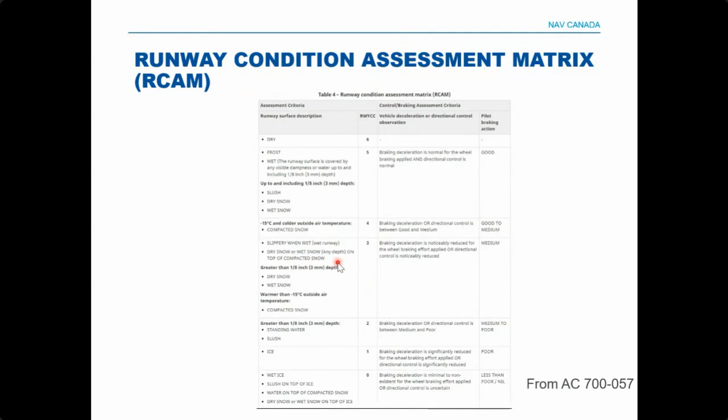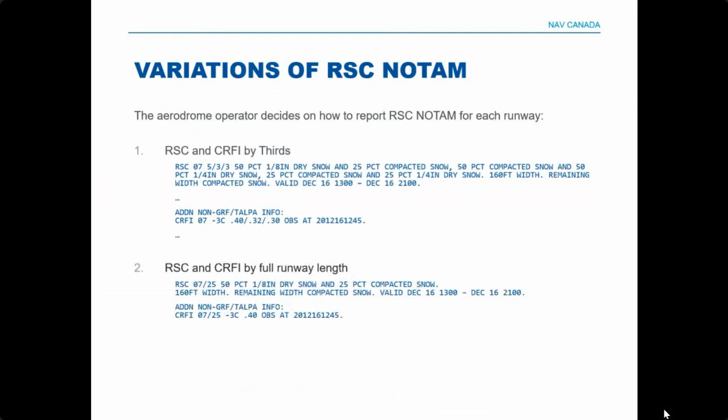However, there are also variations of the RSC NOTAM format, depending on the aerodrome you'll fly into. This is because the aerodrome operator decides how to report the RSC NOTAM for each runway, depending on the needs of their customers. So this means RSC and CRFI can be reported by thirds, or by full runway length, similar to the legacy format, or a combination of the two. It's important to note that the runway condition code is only able to be reported when the runway surface conditions are reported by thirds.

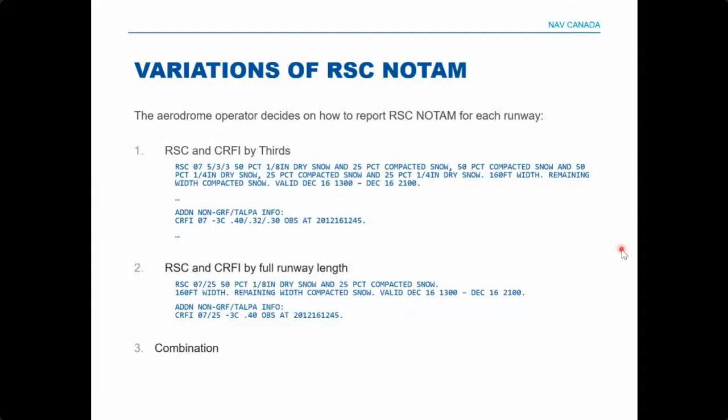In terms of the format itself, there are 3 distinct sections of the RSC NOTAM. The first and largest section is the runway surface condition section, where you find the runway condition codes and the conditions of the runway itself. Next is the CRFI section, where you'll find the CRFI values, if reported, for all the runways. If a CRFI is not reported, you'll generally see the term NR, which means not reported. Finally, there's a remarks section, with remarks available for taxiways, aprons, and then general remarks themselves.

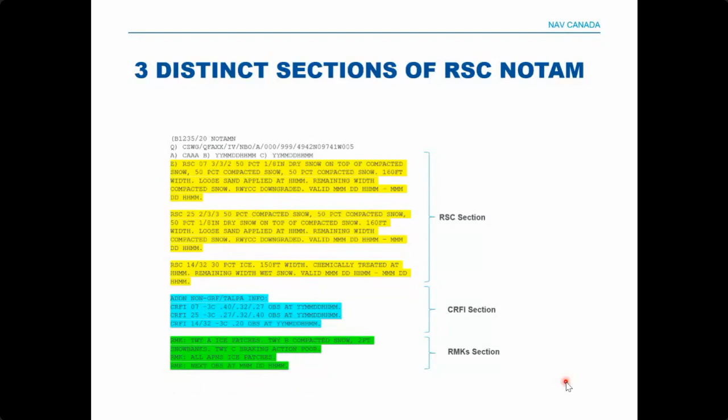In the format, there's an important distinction regarding validity times. The first is the RSC NOTAM validity time, shown in item C of recent NOTAMs. This is simply an administrative time indicating when the NOTAM will be removed from the system. The most important time for your flight is the RSC report validity time, as this indicates the time the observation occurred, as well as the time this report is valid until, in accordance with current regulations. Finally, there's the CRFI observation time, and there is no change from the legacy format.

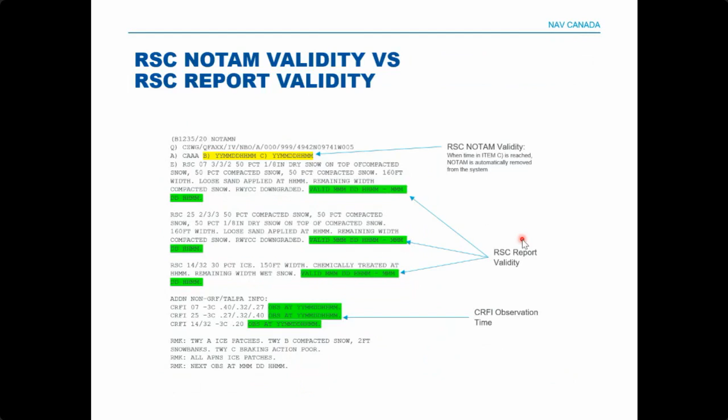Now that we've discussed the format, let's discuss the main differences between the legacy format, NOTAM-J, and RSC NOTAM. What I have here is a NOTAM-J indicating similar conditions as the RSC NOTAM for the exact same runway, done to highlight the differences you'll be able to see. Almost right away, you'll notice the RSC NOTAM has additional spaces in between.

This is done to make it more readable. You'll have a space between each runway surface condition report, a space before the CRFI section, and a space before the remarks section.

The next change is that only up to 2 runway surface conditions are allowed to be reported in RSC NOTAM. As a result, the percentage of coverage no longer has to add up to 100%. In addition, the reporting of dry in the new RSC NOTAM format will only be reported when the condition is 100% dry.

Finally, in order to tell when there are 2 conditions reported for the same section of runway, this is indicated by the word 'and', which has been typed in red to highlight it in this case.

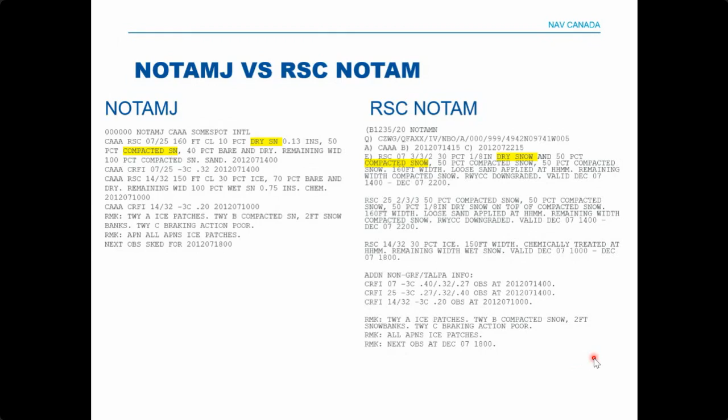Thanks so much, Phil. If I may, just a quick question. For those wondering why this presentation, why now? Well, winter is upon us in many cases, depending. I don't know if I've seen any occurrences yet, but we certainly wanted to keep this community abreast of new changes they need to be familiar with. So there's some changes to phraseology, but a quick question: we know not all aerodromes are made the same, so are there differences in where the RSC NOTAM format would be applied as it relates to aerodromes or airports, Phil?

It's a hard question to answer because it's up to the aerodrome operator's choice. Looking at how they're being disseminated right now, generally speaking, the larger aerodromes would be the ones that report by thirds, and CRFI reported by thirds, because for many of the larger aerodromes it's actually a legal requirement. But for a lot of the small aerodromes, most of what I've seen is that they will continue to report by full runway length, which is more similar to the format you're used to.

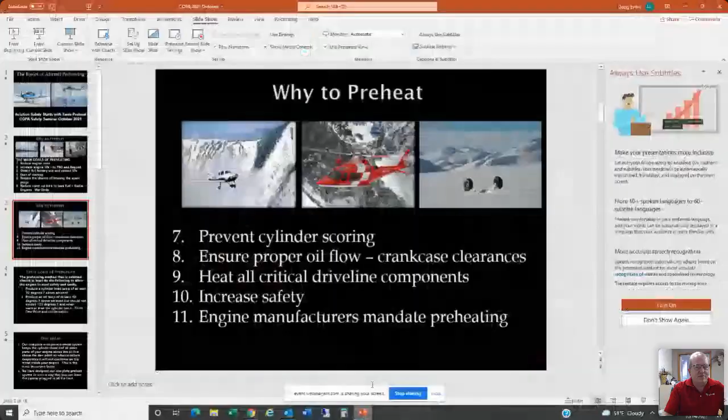Thanks Sharon, and welcome from the United States, since we haven't been able to meet in person very much. As Sharon mentioned, we're going to do a longer presentation in December, so this is the Reader's Digest condensed version of getting ready for winter, and also in the theme of annual inspections. I'm just going to talk briefly about aircraft basic preheating and be available for questions if you have them.

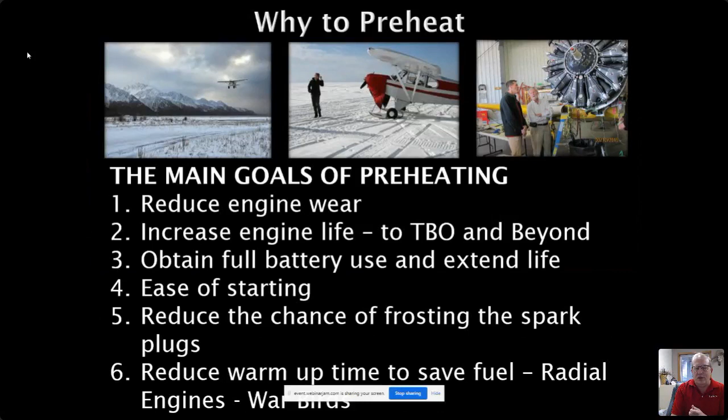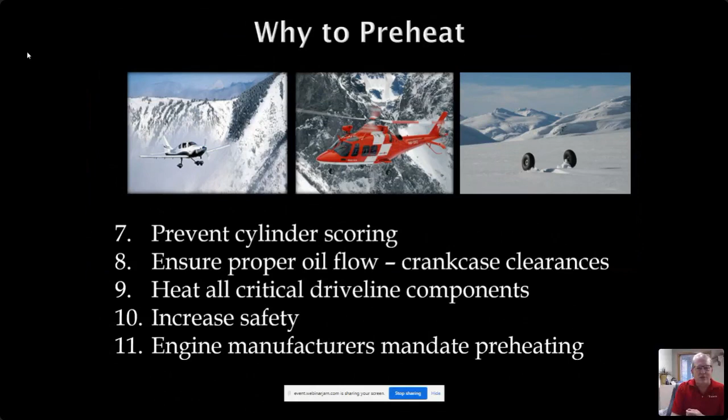So I'm going to run through these slides pretty quickly. First of all, the basics: why do we preheat? The engine manufacturers tell us it's to reduce wear on the engine and ensure our aircraft engine will start. That's really the key part of why we developed our product — to prevent cylinder scoring and make sure you have oil flow, because oil pressure does not equal oil flow. Our tagline really is: Tanis, aviation safety starts with Tanis preheat.

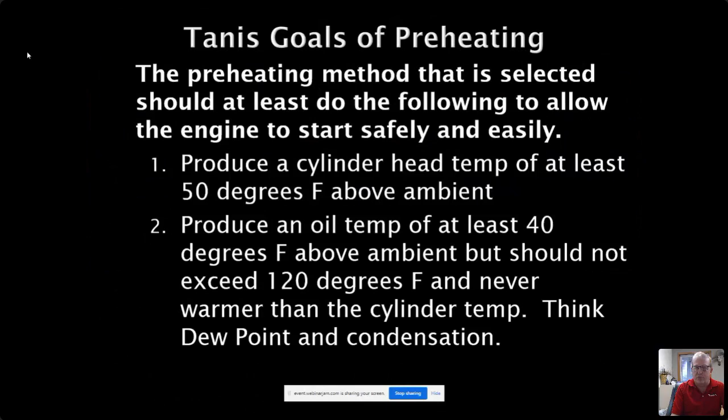So here's some wording, and it gets a little wordy, but I'll breeze through it. When we develop a preheat system, we want to make sure we're getting the cylinder head temperature above 50 degrees above ambient temperature, and the oil at least 40 degrees above ambient. But we don't want the oil warmer than the cylinder.

That's because moisture is inside your oil, in the bottom of your sump. If that moisture evaporates, which it will do when you're heating it up, and it's warmer than the top of your cylinders, it will condense. That's the tip we want to leave you with tonight.

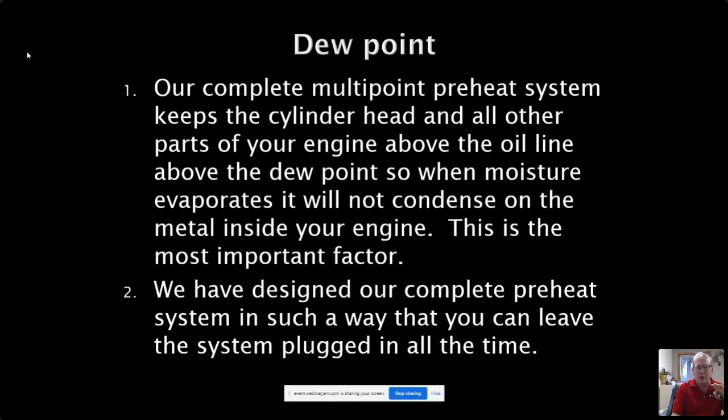We've developed our complete preheat system so that you can leave it plugged in all the time. It keeps everything above the oil line warmer than the oil, and we do that by using very small elements that go inside of each cylinder.

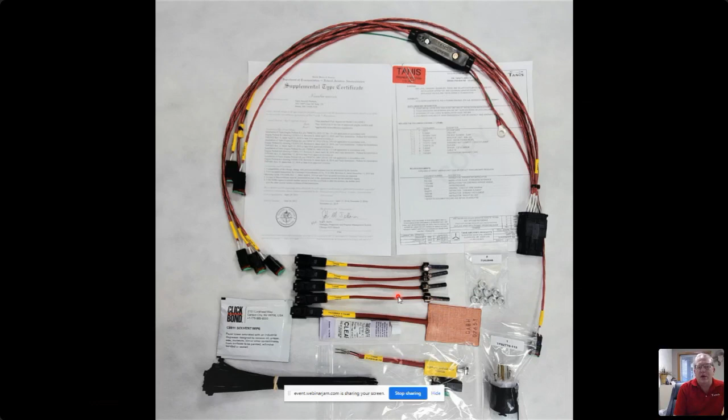You see the 1/4x20 elements replace one of your rocker cover bolts, fasteners, or an intake tube, plus a pad on the bottom of your sump for a 4-cylinder aircraft. If you have a 6-cylinder, you have 6 of the bolts, 1 pad on the sump, and 1 on top of the case.

One of the things we really want to convey is that we do all these tests and share this information. You're going to see some graphs here, but these are also things you can do with most of your planes, or you can surely find that information out.

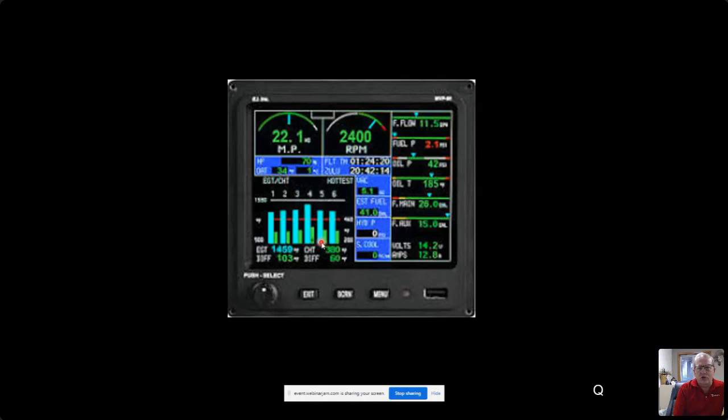If you happen to fly this aircraft, which we're lucky enough to do on many occasions, before you start up you can take a look at your cylinder head temperatures and oil temperature prior to starting the engine, so you know what temperature they're at and how that compares to the ambient temperature you're dealing with. And that drives into this.

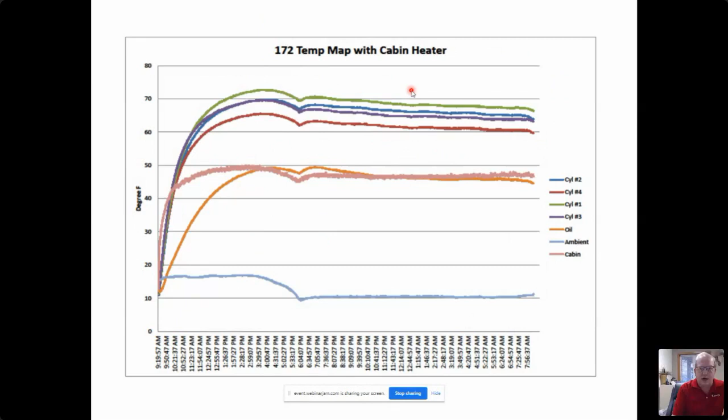If you need more than 50 to 60 degrees above ambient, because several places in Canada you will need that, an insulated cover will give you almost double the effect, but it'll take much longer. Our ramp up is in 1.5 to 2 hours in an unheated hangar. If you needed that doubling, you're going to have to do it overnight, or have a 6 to 8 hour time period that gets that full 120 degrees, or 100 degrees above ambient.

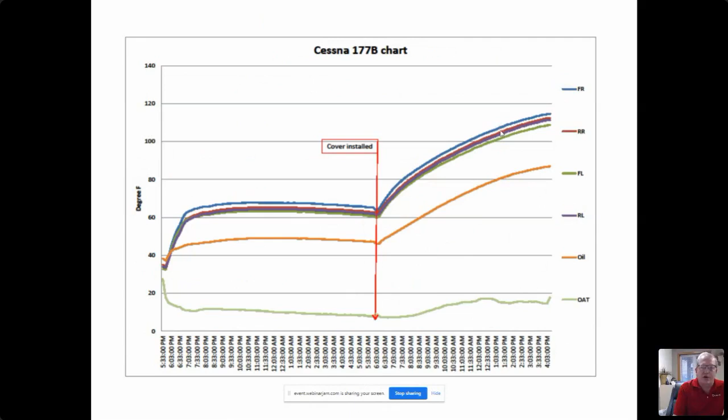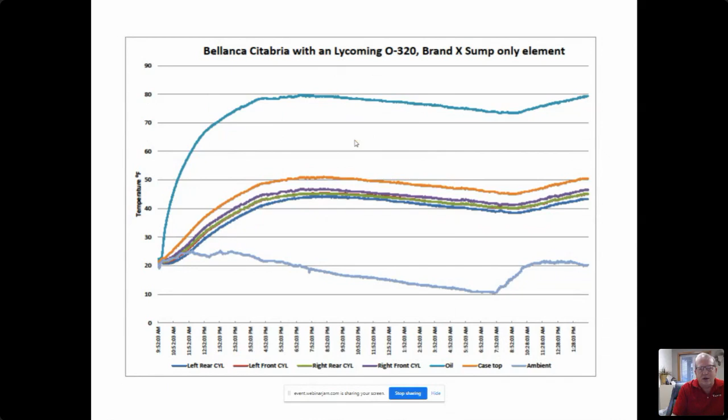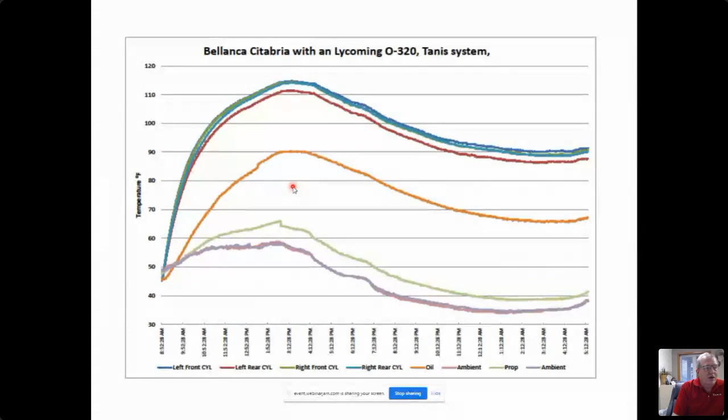One of the easiest ways to find out if your preheat system works is to plug it into a watt meter, very much available from your big box retailers. Our current 4-cylinder system draws about 240 watts, our 6-cylinder system draws 460 watts. If you got 240 watts or thereabout, within 10% on either side of that being consumed, you know that every one of your elements are working, and that's really your annual check.

Other than that, when people are doing annual work, you want to make sure all the wires are secured and there's no loose plug-ins, or where the short power plug is not rattling around to cause any type of concern there.

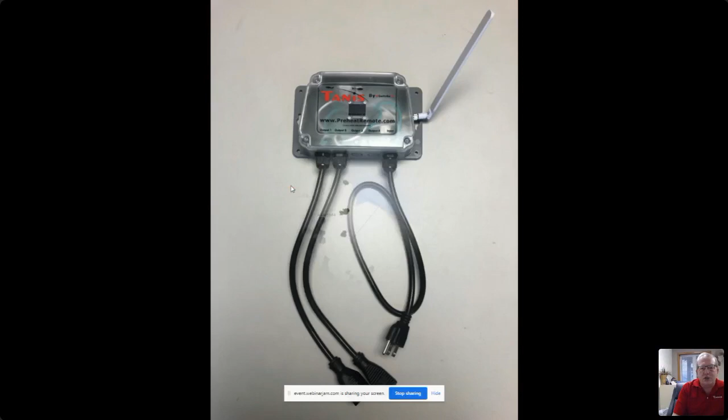And I will jump back out to here. I don't know if you have any questions, I haven't been looking at the chat, Sharon. I'm happy to answer some of them now, or I will hang around to the end too.

Very good. Well, I should have said hello to our neighbors down south. So hi, and no hard feelings on not being available everywhere. There's a couple of questions, we only really have time for one for now.

Really on the duration of leaving the preheat on, as well as how high the temperature can go before it goes south. Yeah, so very good question - can you leave your preheat system on all the time? Ours is the only one that you can. Ours is an STC system, and the reason you can is because we get everything above the oil line warmer than the oil. If you shut it off, or put it on a timer, or you have it on a thermostat, things are going to go up and down, so you don't want to do that.

And the temperature, we get that 50 to 60 degrees above ambient without the insulated cover, and then 100 to 120 with the insulated cover. That is basic, depending on what your ambient temperature is, so we'll ride that curve. And I know a lot of people ask, when it comes to temperature, when should I start preheating? Engine manufacturers basically say you need to when your engine sees 20 degrees Fahrenheit. We see many advantages when your overnight temperatures are starting to get into the low 50s, upper 40s Fahrenheit, from the wear and tear on your engine.

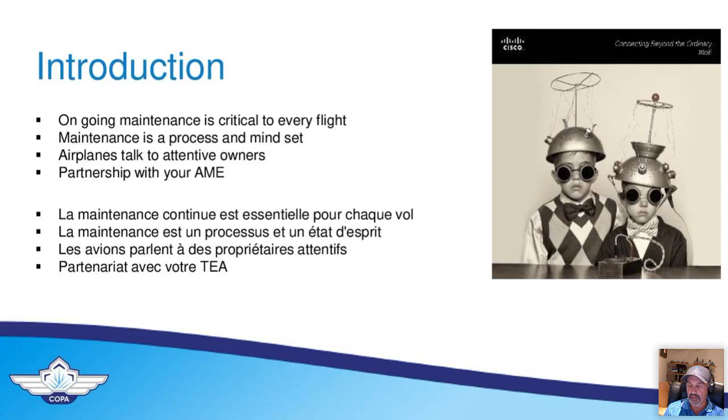To really a better than safe standard. For certified aircraft, the CARS and AIM provides guidance as to what has to be done to an aircraft. But ultimately, the impact of the quality of maintenance is your life, your passengers, and those on the ground. So maintenance and your approach to maintenance is really important.

You should start thinking of maintenance as a process. It begins and ends with documentation, not only journey logs and technical logs, but the process of maintaining and installing parts into your aircraft. For example, the Commander that...

I own in partnership has a parts manual, but does not illustrate to the owner mechanic how to, as an example, remove the front seats. There's a Commander's online owners group that I belong to, and they've posted step-by-step documentation on how to remove the seats without damaging the seat rails.

Just FYI, one of my buddies just reported he was doing it his first time. It took him 3 hours to get 2 seats out of the airplane.

So I hope that you come away from today's presentation with an understanding that maintenance is far more than nuts and bolts and wrenches and screwdrivers. It's all about a mindset. Having resources in hand to help guide you and aid you through very specific processes, but with the goal of moving you from a reactive maintenance to a proactive maintenance program.

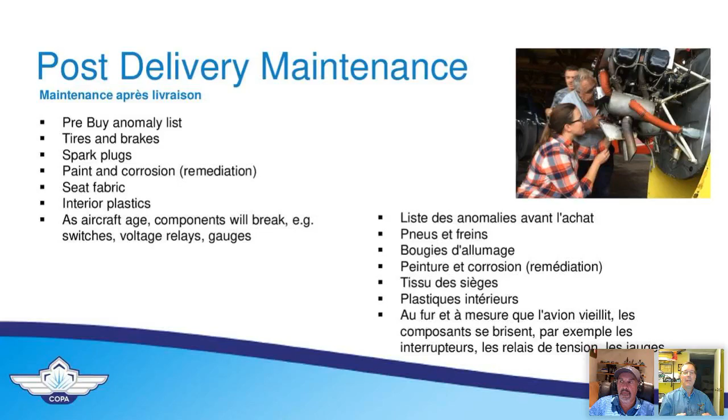So this was a certified aircraft with a certified switch, and it just points to the fact that stuff gets old. Corrosion can happen, it can be hidden in there. Maybe it's time, when you see a questionable switch, to flip it over.

Overhaul versus new components - really depends on how you're looking at your aircraft. There's a lot of very reputable overhauls that will be as good as new. Or maybe you're the type of person that just wants to deal with new.

Mags will be a wonderful, dual, redundant, reliable set of equipment on your engine, as long as you remember to maintain them. Every 500 hours, take them off, get them overhauled. Make sure they're clean - not just inspect and say, yeah, that looks okay. There could be some latent issues for the delta price of getting it done. Again, you're in the aircraft, right?

Solid state magnetos go a long way to improving reliability. And since no two things are exactly alike, a sweet solution is to keep one mag as a traditional magneto and switch over the other mag to a solid state magneto. You get a longer TBO, a little bit of redundancy, and you're not all in with both solid state mags. Keep that in mind.

Gauges - those really reliable fuel gauges in almost every general aviation aircraft, and that stick you use to dip and make sure. Sorry, that sounds a little sarcastic. There are some products out there purporting to be reasonably accurate using modern technologies. Still carry the dipstick, but you may want to consider those.

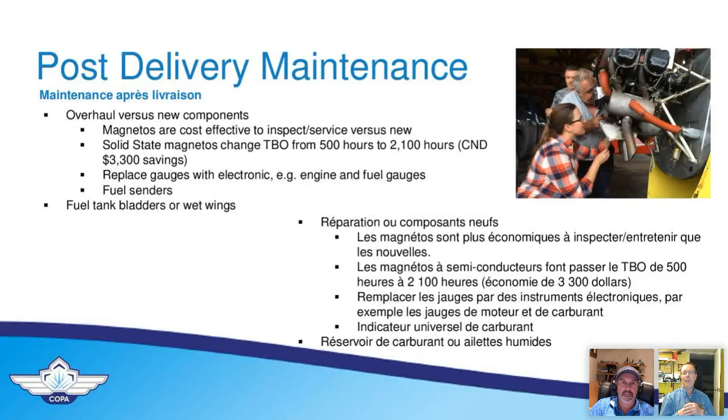And if you've got fuel tank bladders or wet wings, there's probably some preventative tasks that can be done there. When was the last time a tank bladder was replaced? It's rubber, it's going to age, it's going to crack. Do you really want to wait until you're about to head off to Oshkosh on that big vacation and find out you've got tired old rubber that's starting to leak? Or do you just say, hey, it's been 15 years, let's get on with it?

All right, day before your first flight. I think I'm still here, eh Phil? Yeah, you are. Yep, yeah.

Little things you can do to fly this aircraft: talk to somebody if you can find somebody that's maybe flown an aircraft like that type. Crawl through this thing called the Pilot Operating Handbook - it's amazing what you can learn. If you haven't looked at it for a while, particularly if it's your own plane, maybe blow the dust off it and take a look at the speeds.

Remember that a lot of the speeds in the POH are at maximum gross weight. So I'll throw that out there, because you can do the little scaling for your actual flying weight. You may want to know what those speeds are - approach, takeoff, VX, VY - for what you're going to be flying on that day, not at maximum gross.

Avionics and glass panels - there's no need to be jumping into an aircraft burning Lycoming or Continental hours and dead dinosaurs, credit to David Suzuki, on the ground while you fiddle with the panel. I know Garmin and a lot of other manufacturers have online simulators you can download on the computer, and you can play around and get familiar with how that screen works. It might actually help keep your head up looking out of the cockpit on that VFR flight instead of down low punching away while you're safely navigating in the skies.

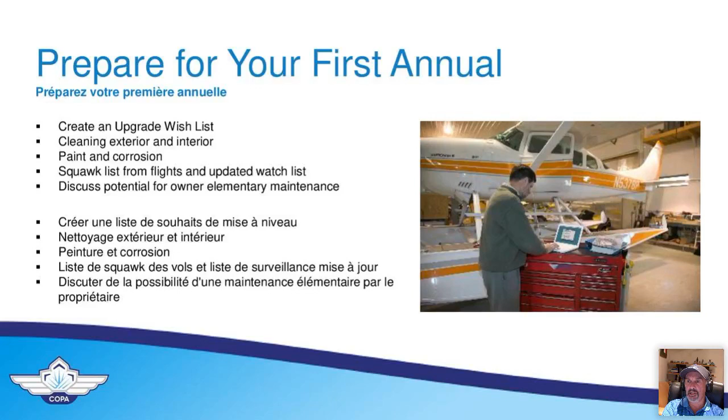Over to you, Pete. Thanks, Phil. Let's get down to what we talked about last month, where the rules meet the road, under maintenance requirements and the responsibility for maintenance. We've talked about this aspect of ownership, and you, the owner, as it says in the CARs, are responsible for scheduling the work to keep the aircraft airworthy, whether it's an hours-based item or a calendar-based item. All of that scheduling is up to the owner.

There's lots of guidelines and schedules out there. The aircraft manufacturers of certified aircraft will have their own developed schedule that the FAA or Transport Canada, if it's an American-made or Canadian-made airplane, approved. That's the easy road for you to take, but it's a bit generic and doesn't necessarily apply specifically to your case or your group's use of the airplane. You can always amend the schedule and get that as a Transport-approved schedule so you're backed up by Transport Canada.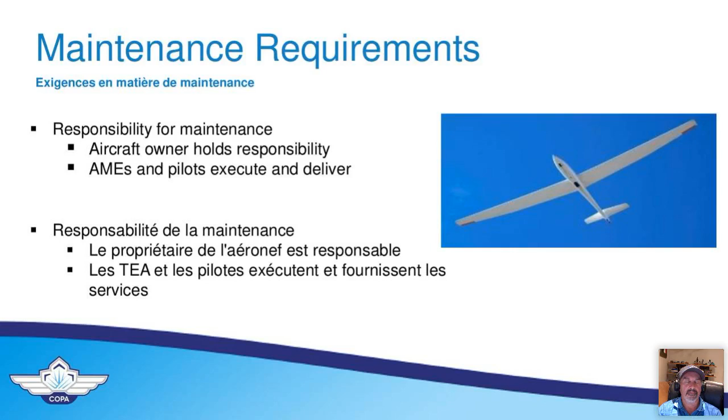So that's your responsibility, the scheduling. The mechanic, the AME, is responsible for the quality of the work, and will detail any discrepancies found and whether they were fixed. The owner is also the one who decides what work is done or not done. In theory, the mechanic only does the work that was tasked and doesn't do work that wasn't tasked by the owner, unless there's an updated agreement and the owner acknowledges the new findings the AME found and tasks the AME to do that.

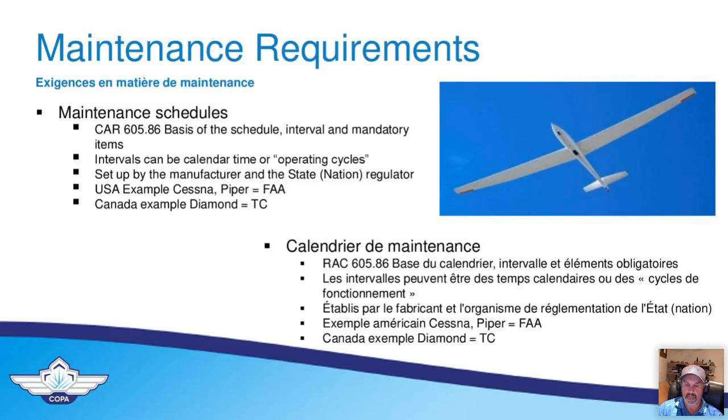That basic maintenance schedule is in CAR 605.86, and it talks about the basis of the scheduling, the intervals, and the mandatory items. As I said, it can be calendar-based or operational cycles-based, and a lot of it's based on what the aircraft manufacturer has told Transport Canada or the FAA when they started.

One of the big items is this notion of care and custody. Just like it says in the airworthiness directives and everything else, you, the owner, are responsible for the care and custody. Your aircraft must be maintained in accordance with the type design specifications for that aircraft, for a certified aircraft, and that's what keeps the C of A valid. By complying with the airworthiness directives, that's how we keep it airworthy, and that's what Phil was talking about.

It's a bit different, a little bit looser and lighter for amateur-built and owner-maintenance aircraft, because there aren't as many applicable ADs to those, except perhaps the engine.

We can also make sure that both the original and updated weight and balance are available. There used to be a rule in the CARs that said you didn't have to do a weight and balance change or re-weighing unless the aircraft changed by about 2%, and it might have been as high as 5% at one point. These days, all it says is that any wholesale mod will require re-weighing the aircraft, and that new weight and balance detail provided with the other documentation of the airplane, so it accurately reflects the current weight and balance in an empty state.

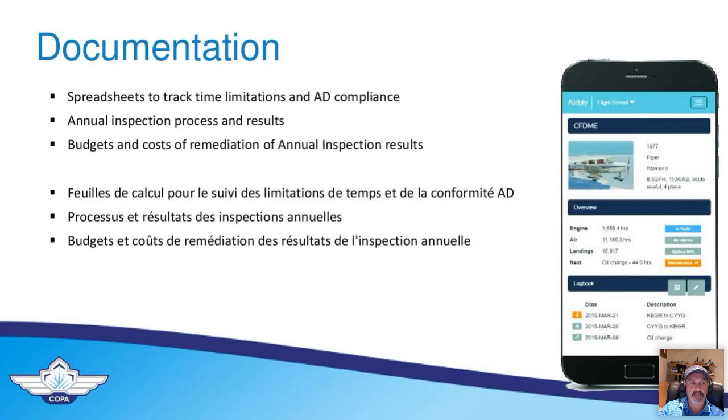So we've bought an airplane and had a pre-purchase inspection. You've got a list from the mechanics that identified hopefully a small number of items requiring attention. Airworthiness directives, safety bulletins, and safety-related items should have been dealt with right after the pre-purchase. Left over might be some discretionary, nice-to-have but non-essential items like upgrades, and you might consider adding them to your mechanics list.

That might be upgrades like USB panel-mounted charging ports. Maybe the aircraft doesn't have a graphic engine monitor like Doug showed in some very cool graphs in his previous presentation. You might consider those kinds of upgrades.

But essentially, the annual inspection has two parts. Step one is to remove all the inspection panels, cowlings, and seats, perform a compression test, check airworthiness directives for any new ones, service bulletins—just naming a few. You essentially create a list of must-do, should-do, and items that could be deferred depending on your budget.

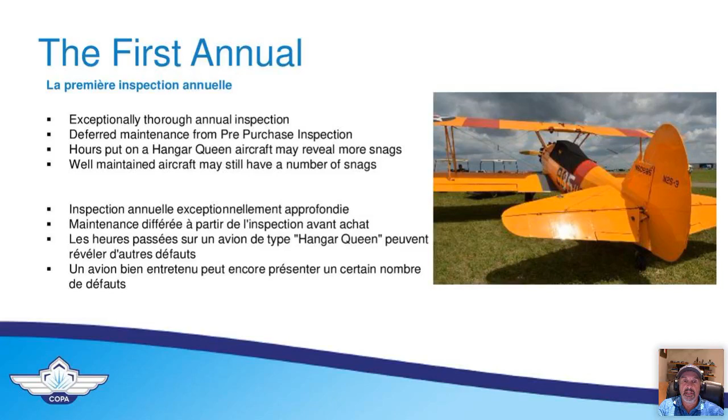After part one is completed, you should meet with your mechanics to review the inspection results and work out estimates of what needs to be repaired and what can be deferred. You end up with a budget that gets executed in the second phase of the annual, avoiding that heart-clenching surprise when you get the bill in the mail.

Critical dates need to be identified and documented, either in the logbooks or in a spreadsheet. These would be time-sensitive maintenance items like oil changes—you might decide to change your oil every 25, 35, or 50 hours, etc.

Magneto inspections and repairs, IFR certification, ELT batteries—the list goes on and on. You might have recurring ADs, where every 150 hours something needs to be inspected. Effective August 1st, 2019, ELT testing requirements have changed, and Pete's going to talk about the new performance and operational tests. There are two different tests, and one of them—I'll hold that for Pete—can be conducted by the pilot owner.

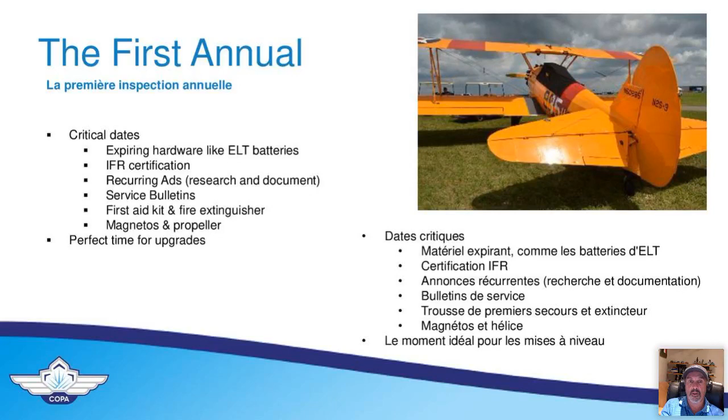Bill, do you want your spreadsheet now? I do, thank you.

Well, I try to walk the walk and talk the talk, as a great actor said once. I apologize, this is an example of my little time tracking spreadsheet. Sorry, it's a bit of an eye chart—there's a lot of information, but you should get the idea of the process.

In order to get the sheet to fit into PowerPoint, I didn't include all the columns, but it's essentially split into two main areas: airworthiness directives at the top, and ongoing maintenance after that. At the very top, which you don't see in the PowerPoint, is the total hours on the airplane, which I update every few weeks. The spreadsheet then calculates hours remaining, for example before the next oil change.

As you can see, some maintenance items are date sensitive, like the biannual IFR certification or the 10-year prop inspection and overhaul. The good news with the Commander is there are very few new items added to the AD list, so mostly only dates and times get updated. For items like the 500-hour magneto inspection, the spreadsheet calculates time remaining.

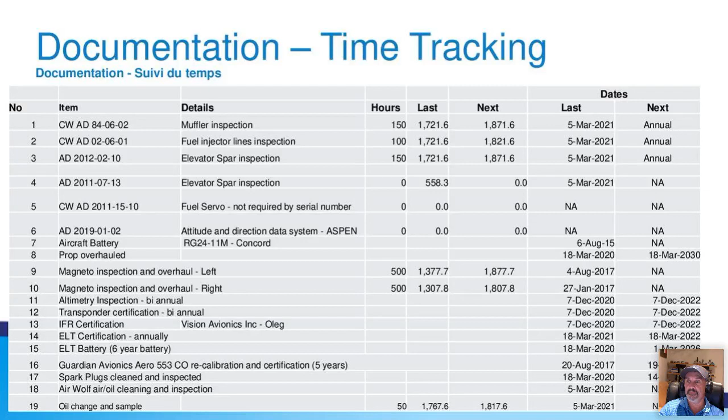Are you on mute, Roger? I come on here. There we go. I hit the right buttons. It helps. Can you hear me now?

Loud and clear. Okay, so you've got your new aircraft. You've flown it for a while, and now it's time for its first annual. And like any complex piece of machinery that is usually 30, 40, or 50 years old, surprise, there's always something. That's part of owning a piece of equipment like this.

We've all been kind of spoiled with the reliability of our next big expensive item, cars - fuel injection, automatic everything, boom, boom, boom. I think a few of us remember the old days of going out on a cold day and saying, is it going to be a 2-pump or a 3-pump morning to set the choke? We don't think like that anymore, and we may get lulled into a false sense that it'll be perfect at the annual with this 50, 60, 70-year-old aircraft, even if it's perfectly maintained.

Things break. There may be new airworthiness directives that pop out, or service advisories or service letters. I look at those all the time because they're usually a precursor to an AD or a bulletin or something, and it's good to be aware. Sometimes looking at the native country where the aircraft is built, they have service bulletins that you may have a hard time seeing here in Canada. Or users groups - I think Phil's mentioned, aircraft user groups are a great resource.

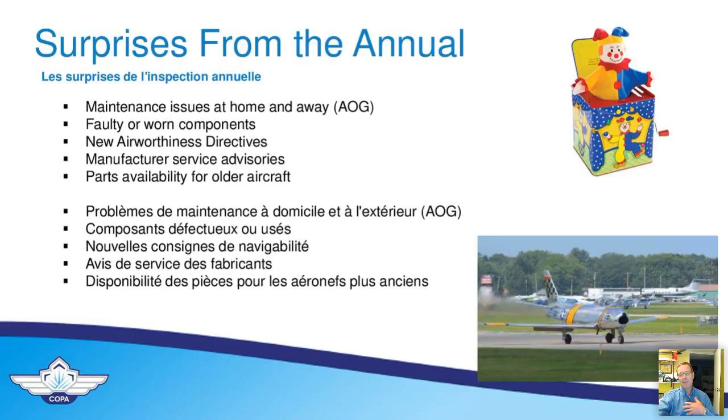And then, of course, parts availability. You may have to factor in that it may take X weeks to overhaul that muffler assembly because that's an ancient 1930s design. When you get the parts coming in, you've got brokerage and freight costs. All of this sort of points to maybe having your annual done towards the end of the summer, giving you time over the winter to get parts together if there's stuff that may be going sideways on you.

And if you don't do a lot of this research, your AME, quite justifiably, is probably going to charge you something for doing most of that research. But if you're going to be an engaged owner, you should be part of that.

The other factor you want to keep in mind with surprises - and the frequency of surprises you might see - is what kind of life does your aircraft live? Is it outside? Is it in a hangar? Is it flying exclusively off grass strips, or exclusively off paved asphalt runways? That's a big factor. Remember, all the maintenance schedules you're following, whether TC approved, TC sponsored, or a manufacturer's recommended one that's been approved, are developed under generic usage conditions. I'll point to examples with our tow planes at the gliding club I fly at.

For example, we have a Pawnee and a Citabria. We're on grass almost exclusively, and some of the runways are bumpier than others. We've gotten into a routine where, independent of service intervals, every spring we replace the tail wheels, overhaul and inspect them, because we know they lead a rough life. We also, every 2 years, will replace - particularly on the Citabria - the bolts that hold the spring steel gear in. They're known to fail.

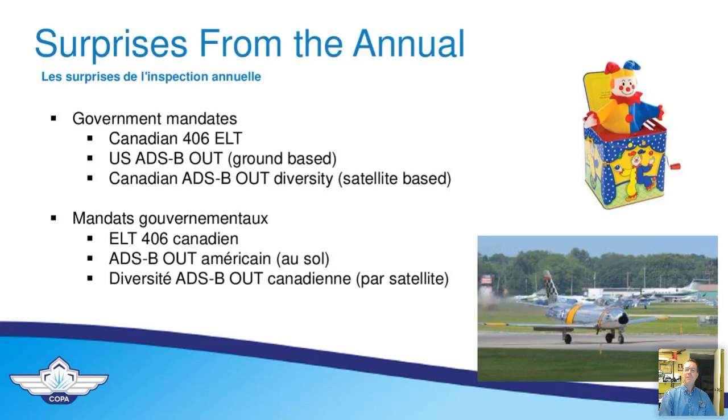Look at what these items are. Anybody that's got a Cessna knows all about seat rails and how they got to be inspected and replaced. We shouldn't be surprised too much, except for things that fail catastrophically. But even then, you can still be prepared for stuff like that.

Another thing is avionics upgrades and migration. Here's a great scenario: I have two friends going through this right now. They've got their DG and their AI. One friend's air pump, the vacuum pump, has just died. It's an older aircraft, an older AI and DG.

It's not smooth, but you can hear it running a little noisy. Another friend, their AI died, and they have this pump, and now they've got the DG running. They looked at the cost of overhauling the AI. Is it time to bite the bullet and buy one or maybe two Garmin G5s or other uAvionix equivalents, put them in, get rid of the air pump, and try to increase the overall reliability of your aircraft's system by doing that?

That might be good money spent in the long term. It may not make any sense if you're going to get rid of things or not fly for two years, but over the long term you probably get that back in the price of the aircraft. And it's a safety and reliability enhancement.

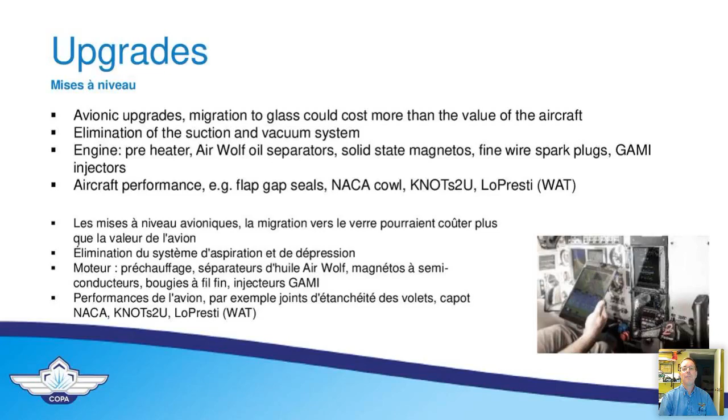Aircraft performance: there's gap seals, special cowlings, everything else, all the stuff that glider pilots know about to increase performance and keep you from burning extra dead dinosaurs. Ceramic coatings, there's a lot of talk and videos coming on that to protect paint. Canopy cleaners, that's probably the best safety feature you could do for your aircraft. Clean your canopy so you can see what's going on out there rather than looking through a whole summer's dead bodies of bugs in front.

I'll throw another thing here about airfoils. In the good old days of Piper, Cessna and Beechcraft with first generation airfoils, they could get pretty rough, dirty, grimy, and there wouldn't be a big performance difference. In this day and age of laminar airfoils, anybody flying a Cirrus or Diamond aircraft with a higher aspect ratio, they are much more sensitive and have a far greater performance degradation when they get dirty. This is a case where keeping them clean actually keeps your performance.

In some airfoil cases, you can dig this data up with sailplanes and gliders, they've gone through this since the 60s. You could have a 30 to 35% performance degradation just from rain on a laminar airfoil, depending on the type, and the same goes if it gets heavily contaminated with bugs. So if you're buying that new Diamond, you might want to get used to keeping that wing a lot cleaner to keep the performance you think you've got. Cleanliness is a form of maintenance.

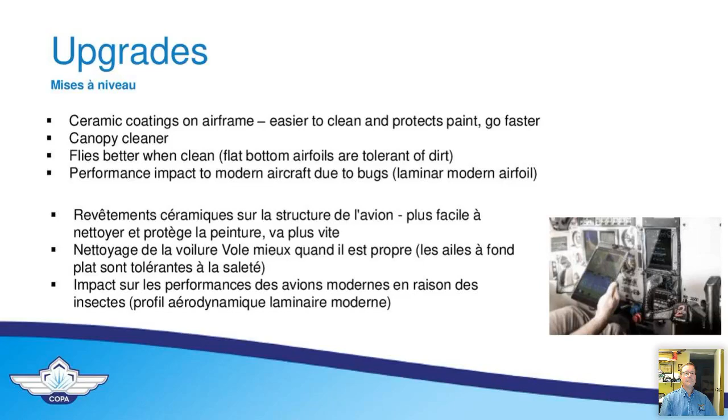Well said, Roger. Yeah, cleanliness next to godliness. Look at the nose of that 172, that blunt object pushing through the sky. There's probably a 172 out there at every flying club that could use 30 minutes of TLC, clean leading edges, and a clean windscreen, or as you call them, canopy. So you can actually look out and go, is that a bug or is that an airplane coming towards me? Let's wait and find out. Not a good answer.

All right, ELTs. I trust everyone with us today is fully aware that Government of Canada, Transport Canada regulations have directed the migration to the 406 ELT. In most cases, you must have the new ELT installed in your airplane and working by no later than November 2025. So as Roger said, a few Christmases from now. There are no direct alternatives to that ELT, but there are enhancements that will make it even better for you.

They're not replacements. There's a thing called a PLB, or a personal locator beacon. One of those types of devices is in the upper right-hand corner of this presentation. The Spot X products are ones.

There's others. Whether it's a 406 ELT or a PLB, all of these locator beacons, emergency locator transmitters, need to be registered with the Canadian Beacon Registry in Trenton. These are satellite-based systems like the 406, like the Spot. The Find Me Spot is an excellent GPS tracker as well that can serve as a PLB. It provides tracking, and there are also COPA discounts as well.

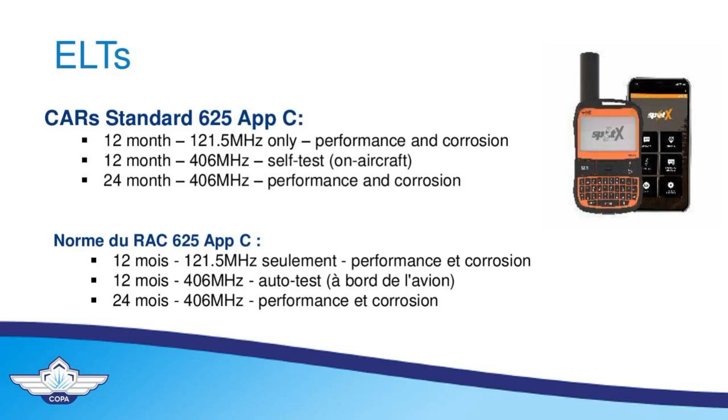And in that case, it has to be done in an electronically and magnetically isolated shop container, so that the system doesn't get alerted and start having people launched, or phone calls made, or that sort of thing. So that's the difference between the two different types of testing, the self-testing and the performance testing. Operational testing and performance testing, sorry.

For the two CAR standards there, we had 625 Appendix C and 571 Appendix G. That corrosion, inspection and performance test for the 121.5 is basically the same as the operational test. The 406 megahertz corrosion inspection performance includes digital messaging, confirming that the bit coding is all correct, and that is a test that has to be done in the shop.

And all of those things came out with the CARs about a year or two years ago now, with the new battery performance standards. One of the things that's changed with the 406 is there's a 2-year inspection on the batteries and/or replacement, depending on the manufacturer's requirements for the battery. So there is no hard number in the CARs for the 406, it's as per the manufacturer's stipulation regarding battery life.

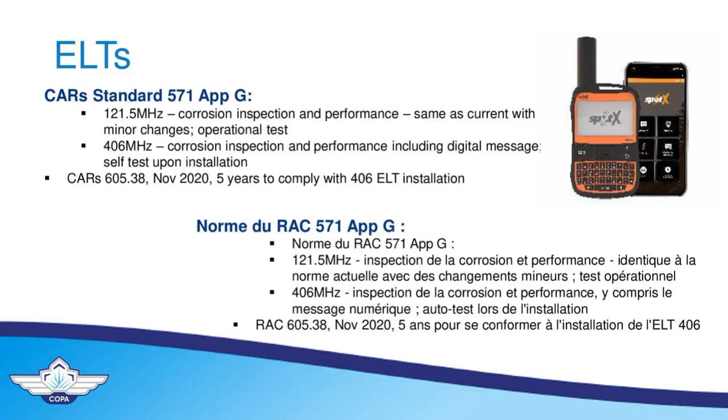Let's go to the next slide.

So these two words that confuse some people at times, operational test versus performance test. The operational test is an on-aircraft confirmation that the system works using the testing function that's built into the unit as it came from the manufacturer. It may use a panel-mounted switch, or it may be a slightly different procedure as described in the manufacturer's documentation.

As I said earlier, the other test, the performance test, is a signal radiation strength test, and that requires the item to be turned on, which, if it was turned on in the airplane, you've now essentially launched SAR action, because the system will see an activation, triggering the response system, sending an email to the owner, or possibly a phone call from the Rescue Coordination Center. So to prevent all of that kerfuffle, the performance test must be done in a shop environment using specialized equipment. It's not a long test, but that's what's required.

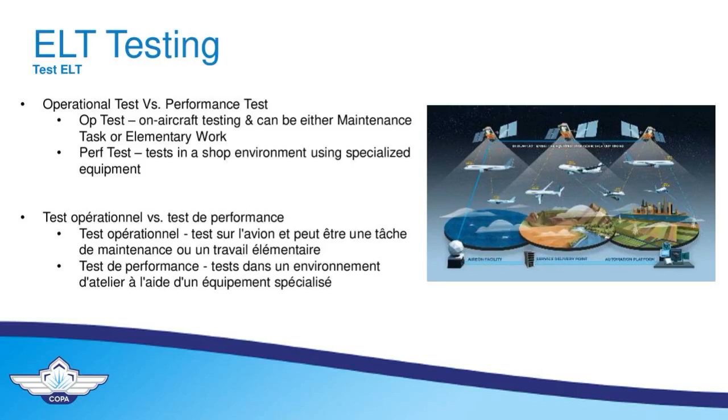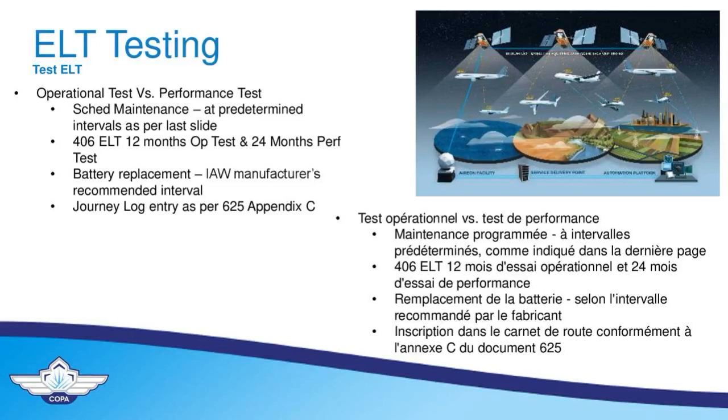And then, as we said, for the ELT it's 12 months for the ops test, 24 months for the performance test, battery replacement as per the manufacturer's guidelines, and of course journey log entries as per 625 Appendix C. God bless that. Phil, back to you, sir.

Okay, so we've just finished the first annual. It's your very first airplane. And I can tell you, having owned airplanes, that you get these butterflies in your gut. They become very active during that first flight. It could be one of life's most memorable moments, maybe right back to your first solo. But you need to suppress that excitement and treat that first flight in a professional manner. Again, it's your life that we're talking about.

You want to do all your homework well in advance of the first flight after annual. Update any checklists that might have changed based upon adding new avionics or doing upgrades like ADS-B. Perhaps you could get some support from the previous owner if they're not too far from your airport. After all, it's not a bad idea to get another set of eyes and ears. Take your time during the walk around, make sure that you're not distracted, and try to avoid chatting with people, admiring your airplane, or answering your mobile phone.

You want to check for any leaks like oil, fuel, or hydraulic fluid. I like to use a high intensity LED flashlight during my walk around. It helps me focus on areas of the aircraft that might be shaded, or for viewing the quantity of fuel in the tanks. I use it to help me look at the retractable landing gear.

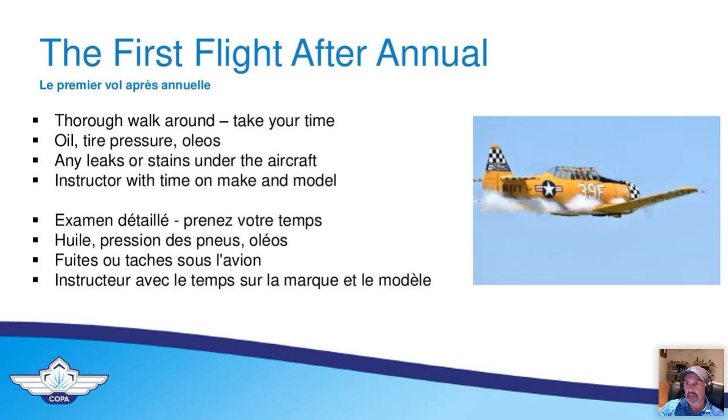Another good idea, as I said earlier, get support from the previous owner, but you might want to consider taking a flight instructor with you, especially if you're a lower time pilot. Have all the appropriate documents in the airplane. Spend some time with your flight instructor, discuss a flight plan. It might actually be a good idea to wrap a biennial flight review into that flight, just to get you proficient with flying the airplane, as well as meeting your regulatory requirements.

And you could be practicing flying skills like slow flight, 360-degree turns both at shallow and steep angles, forced landing, stalls if your airplane is appropriate, spins. And with the help of your instructor, really get in tune with your aircraft while sharpening your skills.

You want to know your emergency checklists and the procedures for engine failure, let's say during a climb out. That's a really bad time, obviously, for that to happen versus being at 8,000 feet AGL and cruise. So you want to remember those checklists: best glide speed, primer in, fuel selector to both, fuel pump on, engine restart, 121.5, Mayday, etc. And start to think in your mind, when would you consider a turn back to the airport if you were to lose the engine in climb out, at what altitude would you do it?

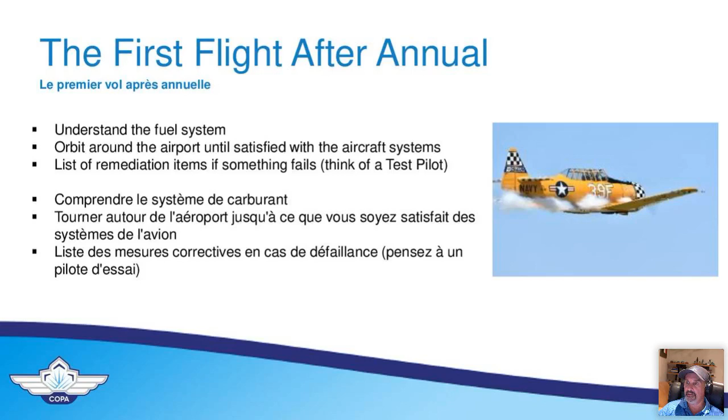With that, I think it's over to you, Pete.

It's a pro that part of the process creates self-reliance and learning. A pro is that you're getting on a pathway to doing more maintenance by yourself, for yourself. That's going to make you more of an owner, probably going to save you some money, and you'll be more self-aware. It's going to help mitigate the impact of surprise failures because there'll be fewer of those. You'll develop a proactive approach and deal with issues before they become an AOG issue, aircraft on ground, and this will, again, enhance your decision-making process.

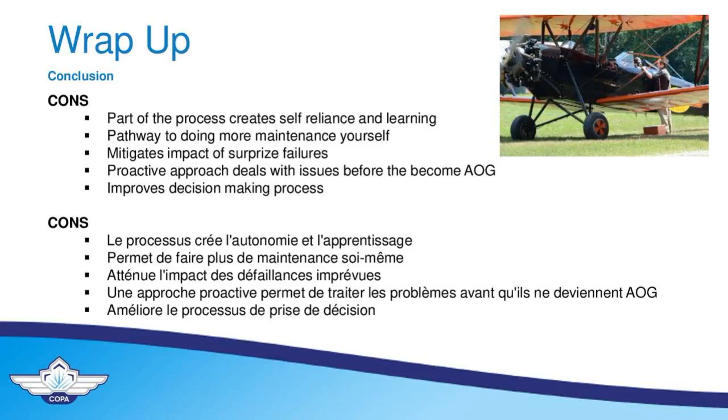Time commitment, is that a pro or a con? I think it's worth it. Some people might look at that as a con, but I think it's worth it because it's going to enhance your ownership satisfaction. Basic mechanical understanding required?

Sure, same thing. But you're probably going to become more aware. You get a little bit of grease under your fingers. You'll be able to relate to the guy or the company that's fixing your airplane, and I think it makes you a more complete owner.

People skills, definitely required, definitely a plus. And as Phil said at the beginning, see COPA flight articles, plane talk podcasts, COPA magazines, COPA national buyer's guides. There's lots of information out there that's going to make you a more complete owner, and that's really the whole point of our seminar session tonight.

So we're going to start to wrap this up with contact information for Phil. COPA has started offering, as one of our enhanced services, access to Phil's Plane Talk material. I think it's a great addition to the breadth of material that COPA already provides, and gives members another feather in their cap for a better ownership experience.